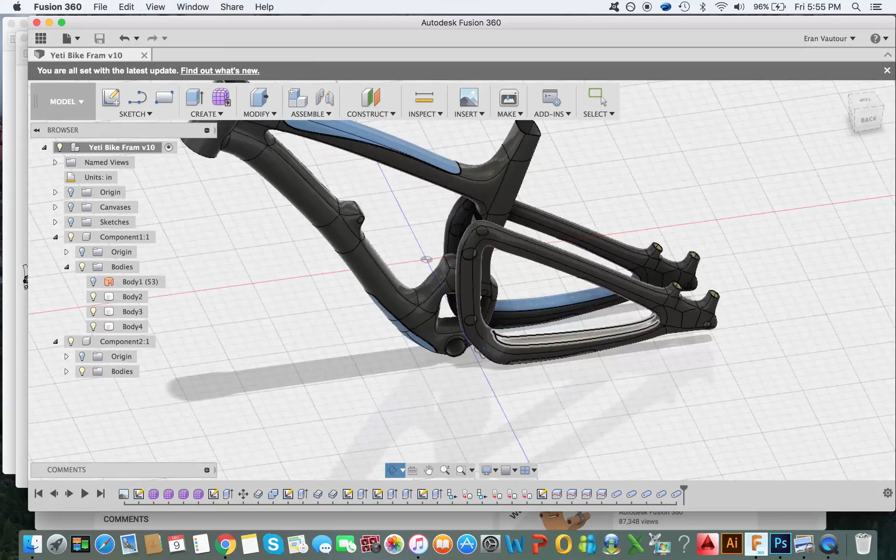Hello, today we'll be modeling the Yeti SB6 mountain bike, just the frame part of it. So we'll hop right into it.

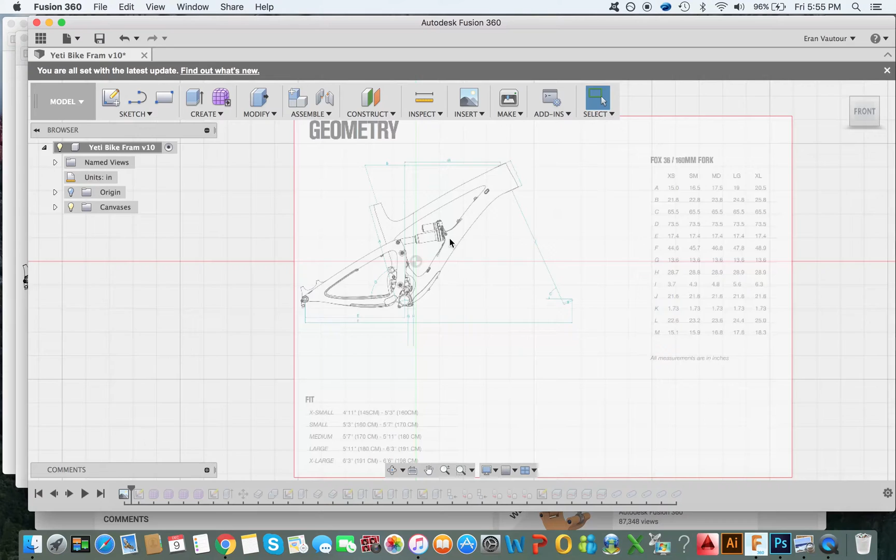Running through the overview of the project, I started by inserting a canvas. I chose one that actually has a lot of the measurements on there. I did a large frame, basically just created a line and then scaled the canvas up to 48 inches.

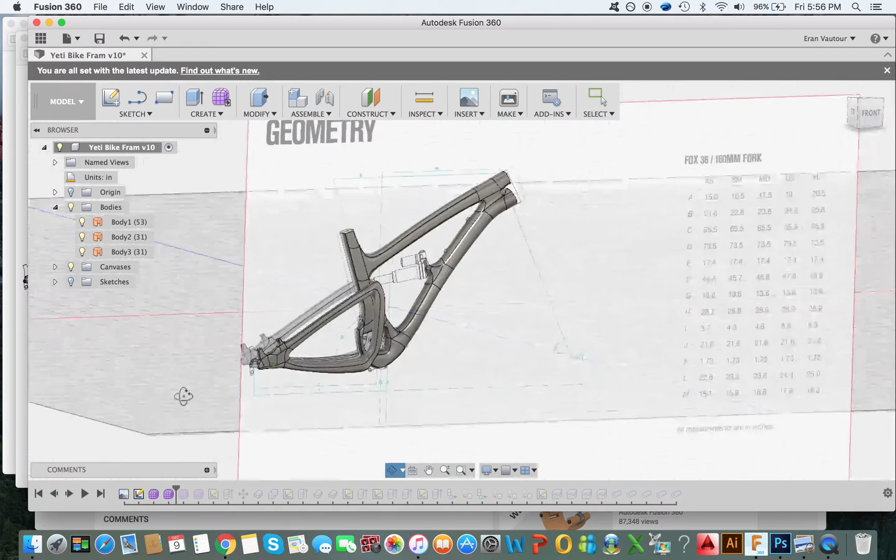Then we sculpted basically the bodies in two parts: the first, the mainframe part, and the back for the rear wheel.

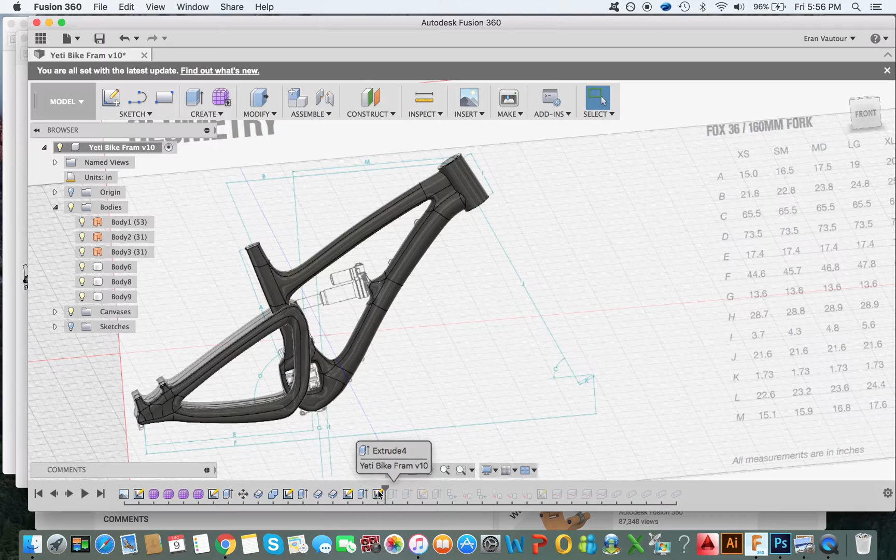Then I basically created a circle and extruded that in order to create the cylinder for the front fork. Rotated, moved that into place, and joined it with the front frame.

Cut out some holes for where the crank would go, as well as the pedals, and then just some of the nuts and bolts that could be added in later if you want to go further.

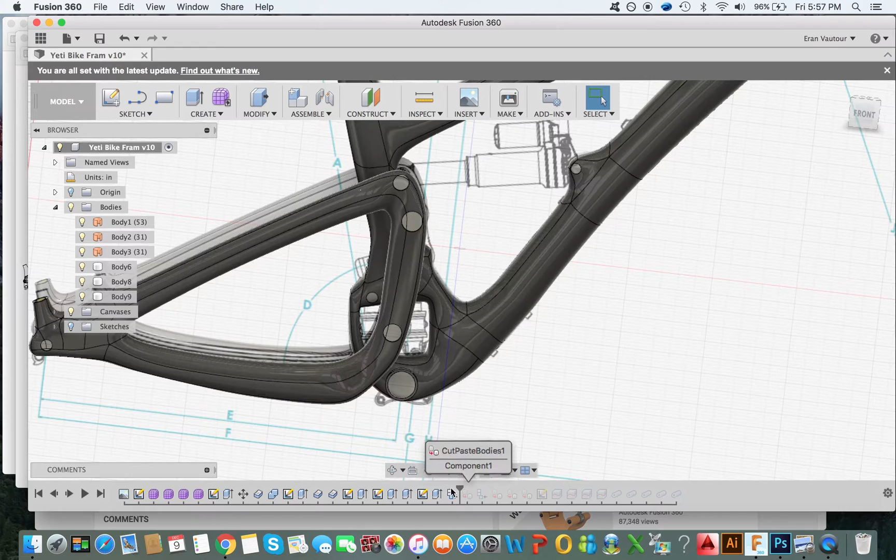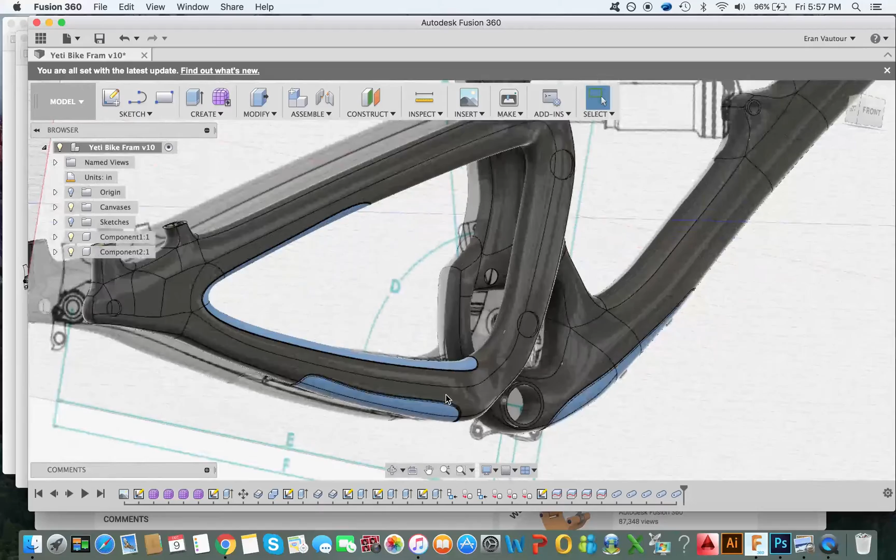As well as extrude some other circles, basically just some brackets in order to fill out the empty cut, and created those, made those into some components, attached some layers, and split the bodies to add some carbon fiber highlights.

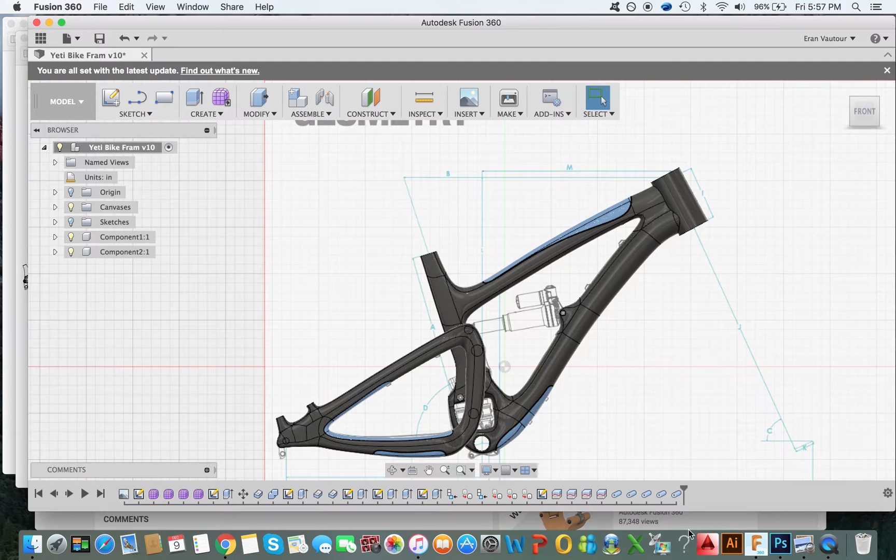Then took the pipe command and ran that around the splits in order to create a nice little parting line. And that is the finished product.

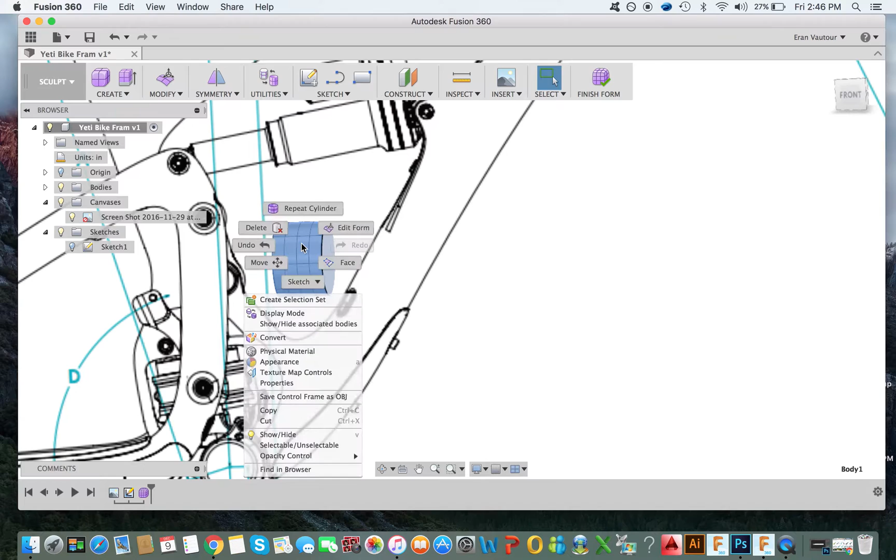So getting started, like I said, I just started by sculpting a body. I started with a cylinder, so I created a circle, I think about 2 inches in diameter.

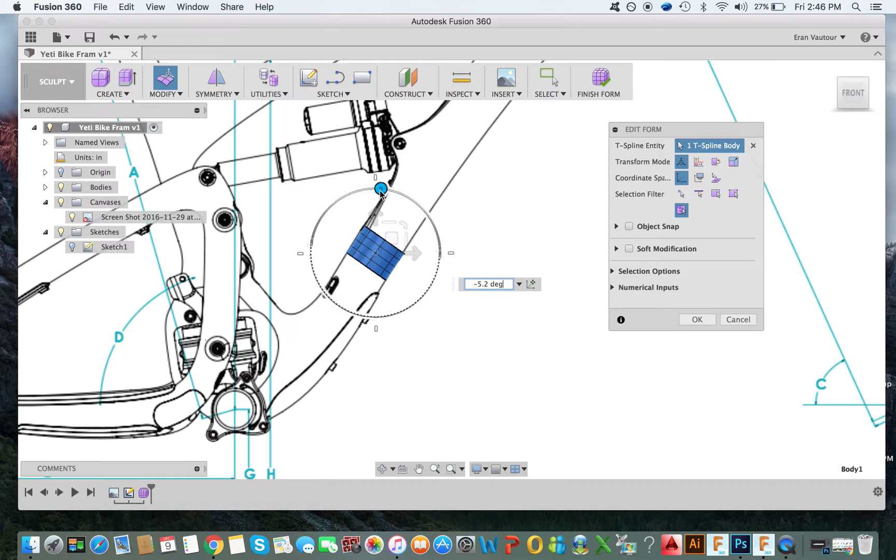Then took that cylinder in the sculpt environment and rotated that into place using an orthographic view. And that was the starting point for the first frame.

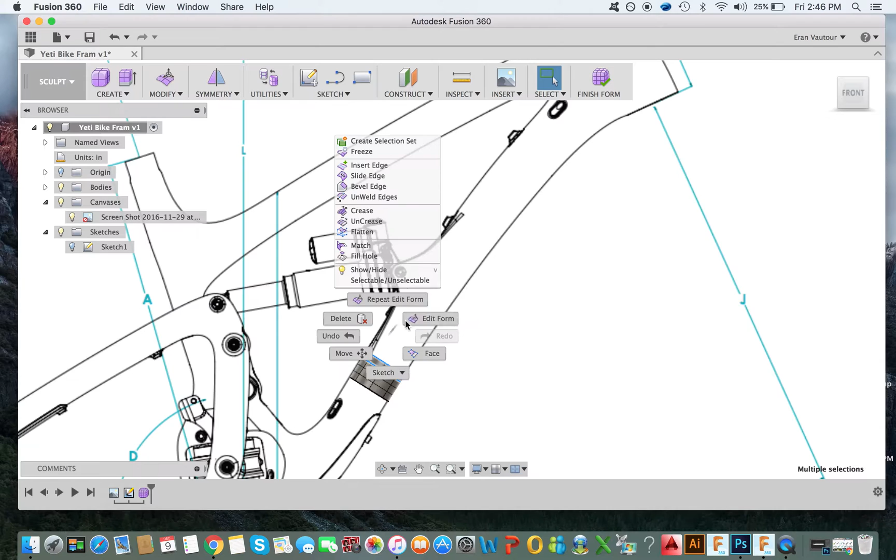Now this process did take a couple of hours, so I sped up the next part of the video to show you some of the tweaks in building the rest of this frame a little faster. It does get a little choppy at some points, I think because the screen recorder maybe didn't record with enough frames per second, as well as just periodical lag while I was using the program. So bear with me on that.

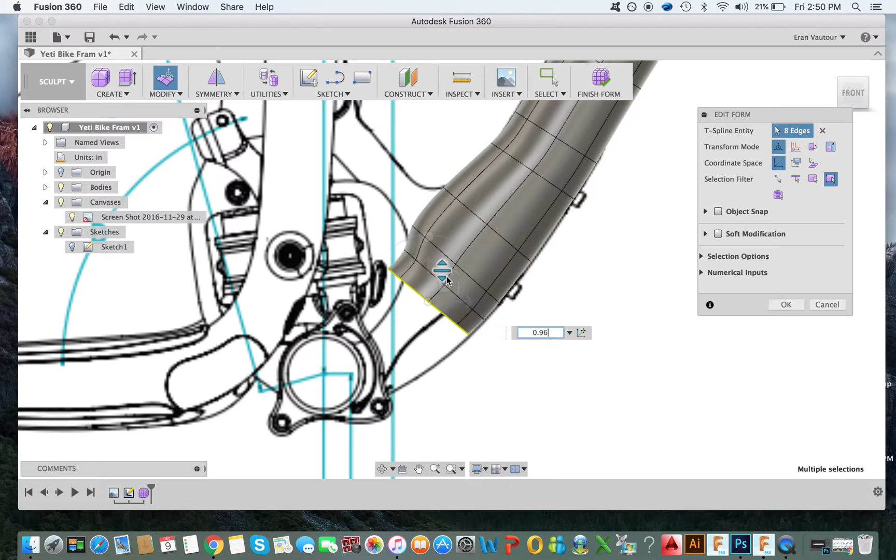Basically, then use that cylinder and drag using the Alt key to add material, so just dragging that and scaling that, matching that canvas.

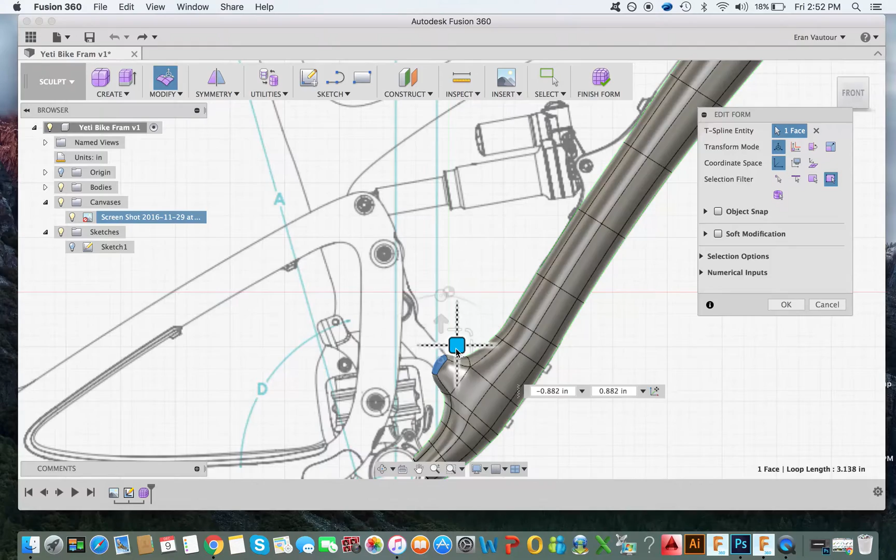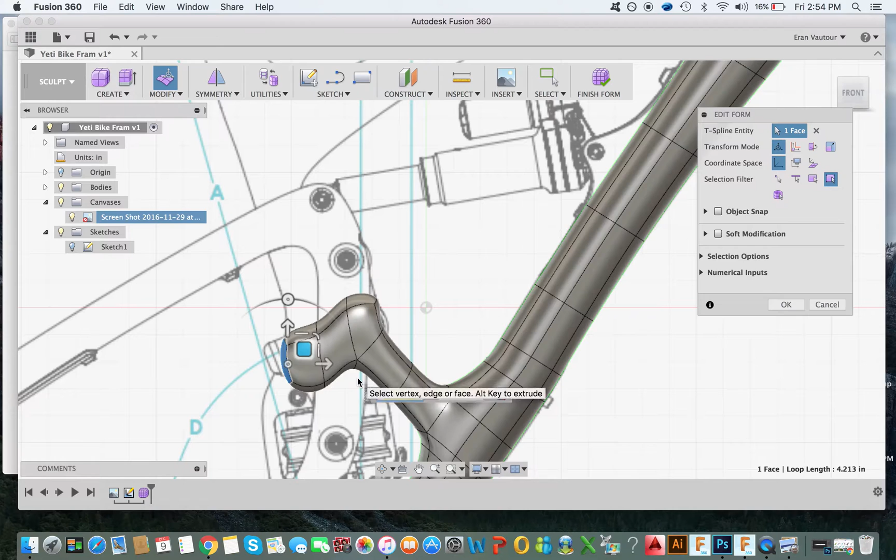Now at first I did think I could use symmetry, however after I built this part of the frame I realized that it was actually extruding two separate parts, as you can see right there when I turn a little bit. So I had to go back and turn that symmetry off and then just make sure I was clicking both sides to grab both faces.

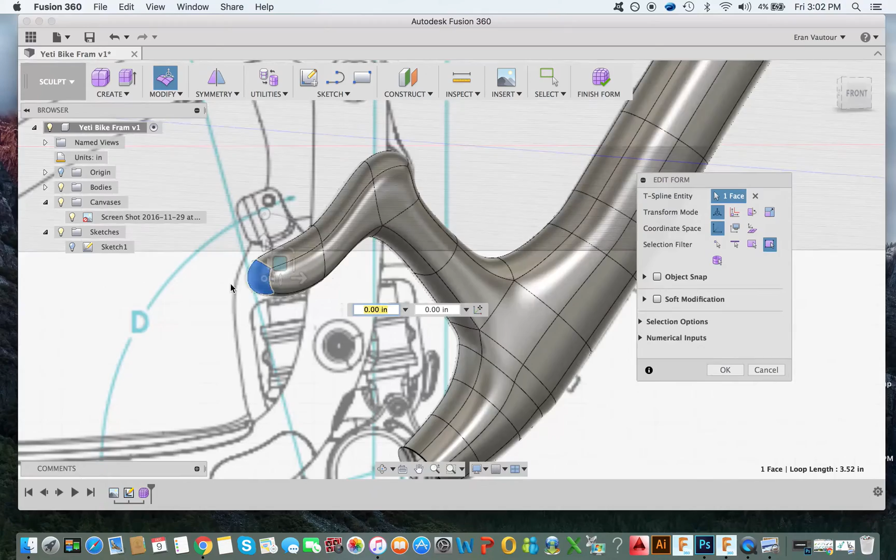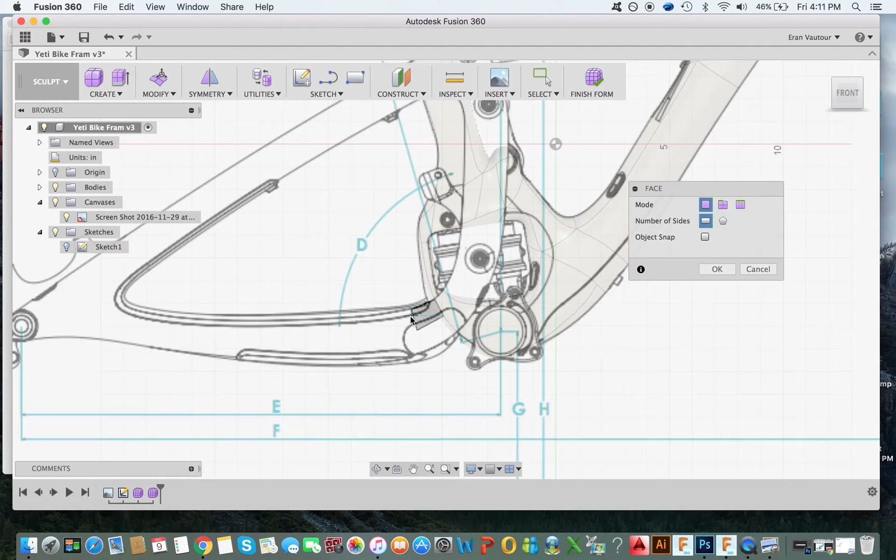So after I went through and created that entire top frame, I then moved on to the second sculpted piece, which was the back of the frame for the rear wheel. I decided to do this one using the create face command.

Basically just traced out some faces along that outline there, making sure to click on 4 points.

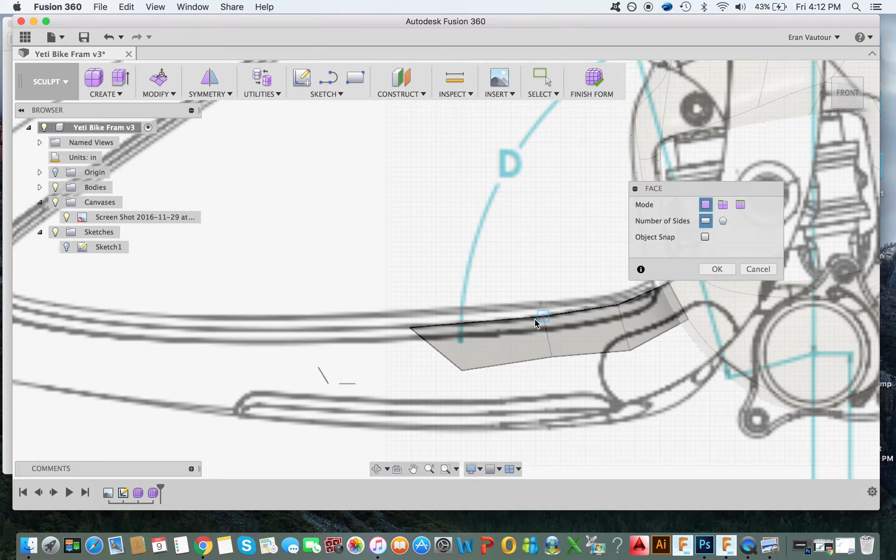I knew that I only wanted it to be about 2 faces wide, so just making the boxes about half of the height, and then always making sure to try to keep the geometry as clean as possible, so not too many slanted corners, although it does get a little wacky in some places.

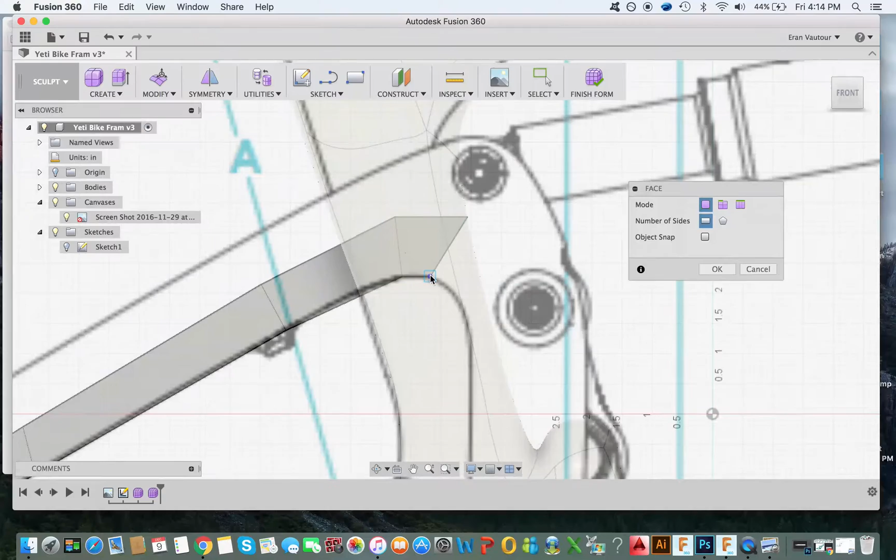And I was occasionally checking out an additional picture, just to give a little more information.

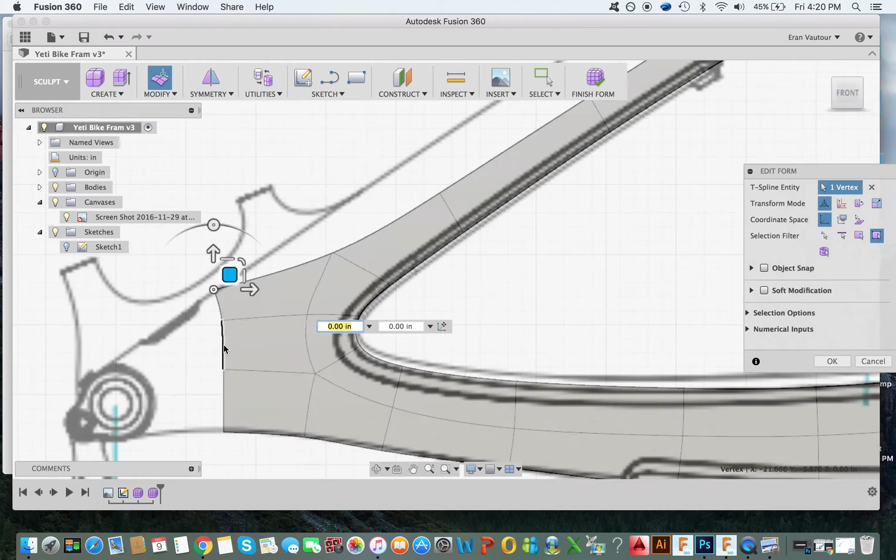So I went ahead and sped this part up as well for you. Again, sorry, a little bit choppy, but basically just creating faces around that image there.

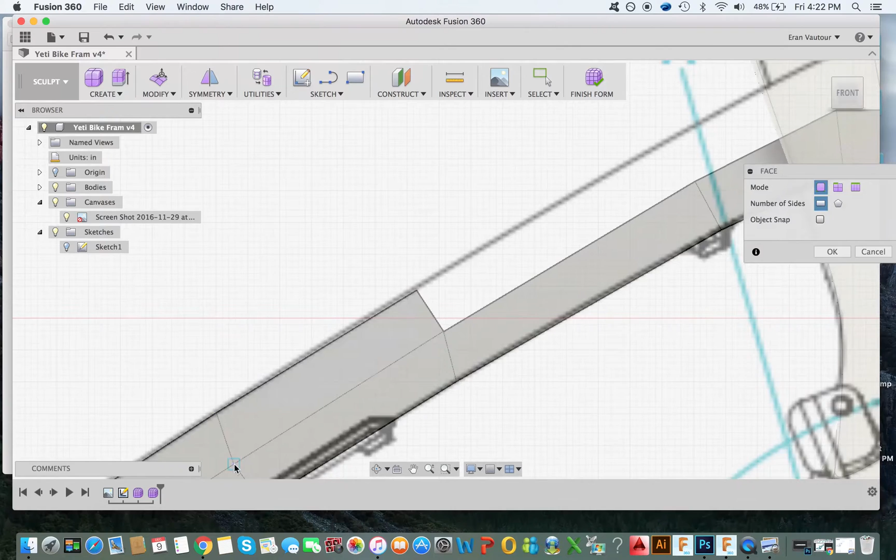One thing to keep in mind: making those smaller faces as you go around the bends so you get a cleaner curve.

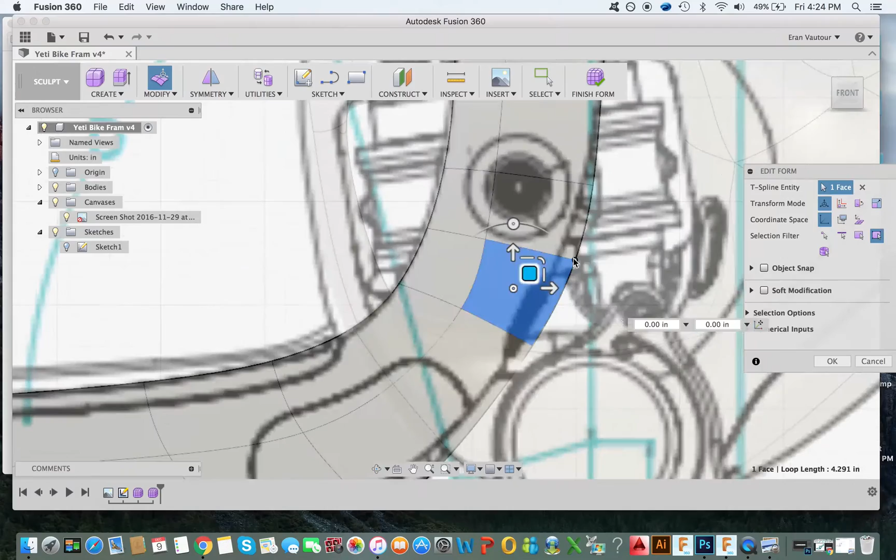Those faces get a little slanted. Didn't cause me any problems, but something to be conscious of.

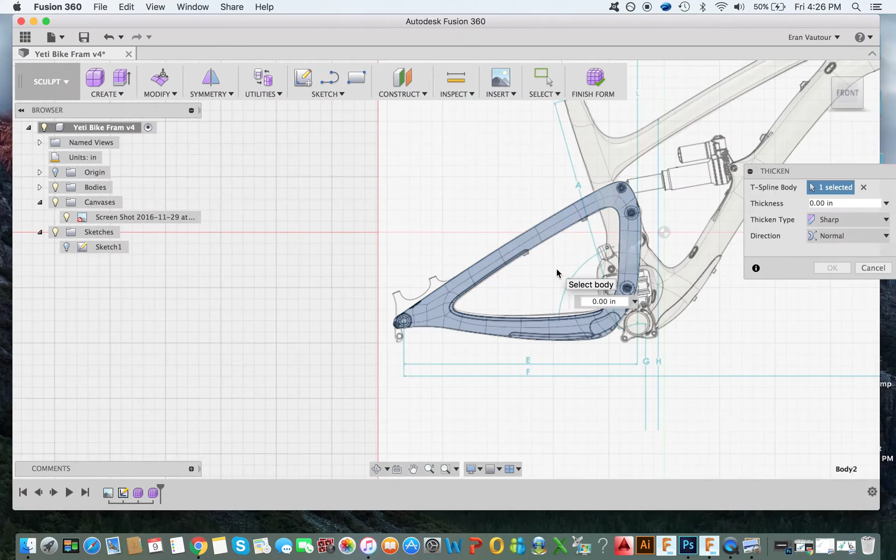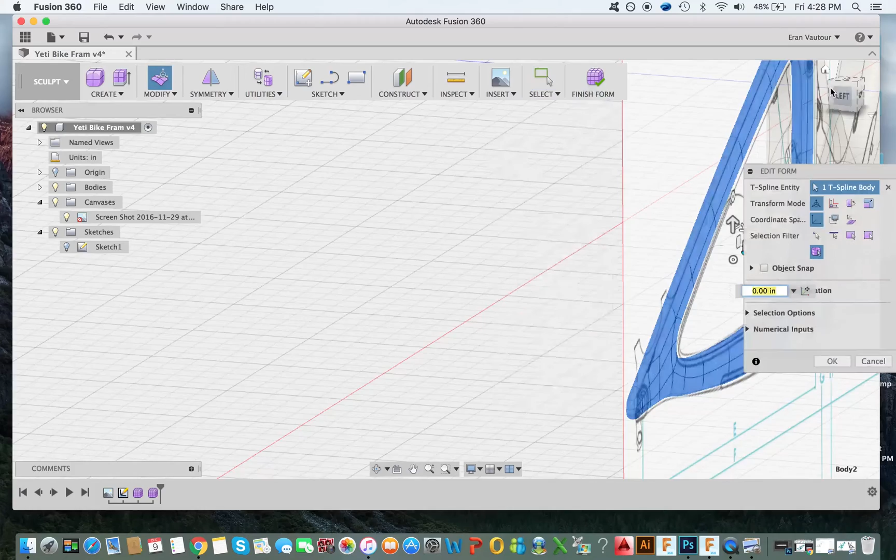And then just tweaked out, made sure everything was lined up correctly. Had to do a little bit of problem solving down here as well, just to create that curve making sure I was using 4 faces.

Always make sure to save as you go. Definitely had this crash on me a few times.

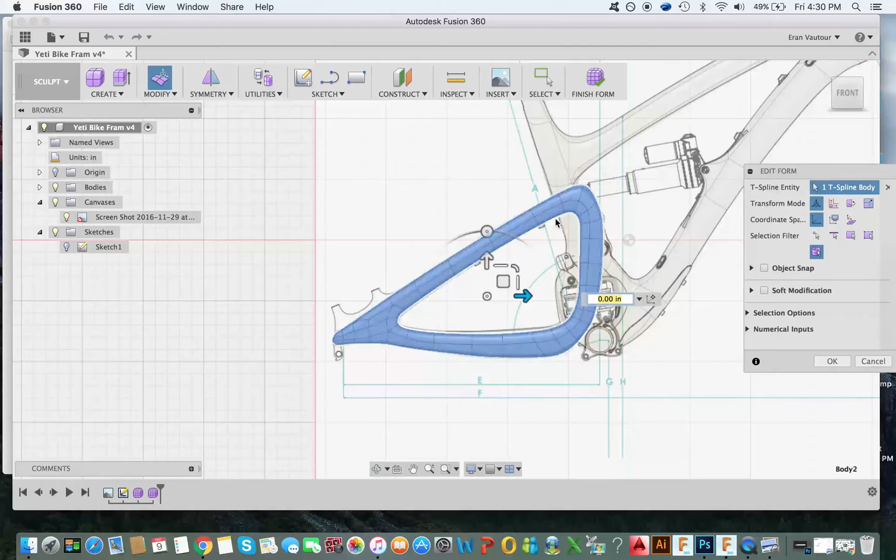So not the cleanest geometry, but it wasn't necessarily going to be the most complicated part. Some of those faces were quite alright, just being a little slanted. A little more tweaking to get everything lined up perfectly.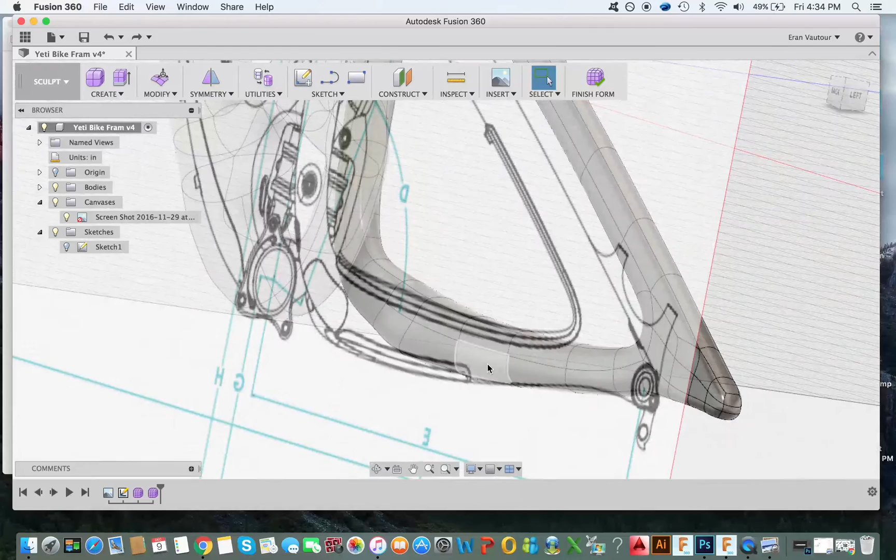And just checking to make sure I was getting everything right by looking at that other picture, a different view.

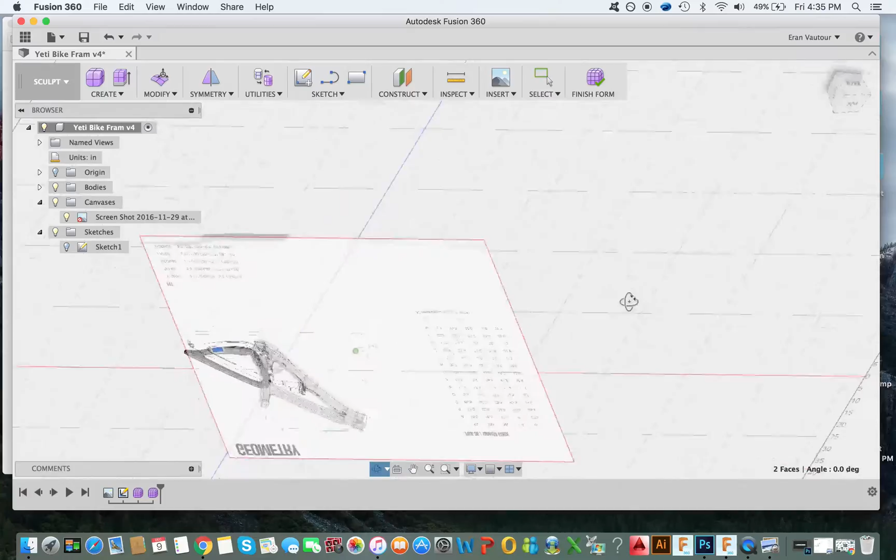I then thickened this so that it was, I think, about a half an inch to make it an actual structure. Made sure to click soften, thicken, so that those were nice rounded edges. Actually, I think I did about 1 inch.

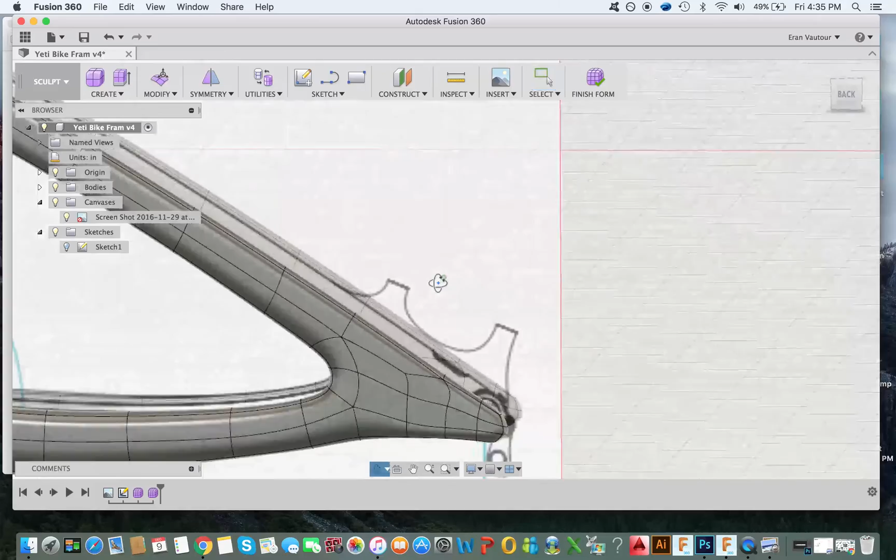Moved it over so that it was on the sides, and expanded the back part of it out so that it had room for that wheel, and then it dips inward to connect to where the frame is. See that in just a minute. There we go.

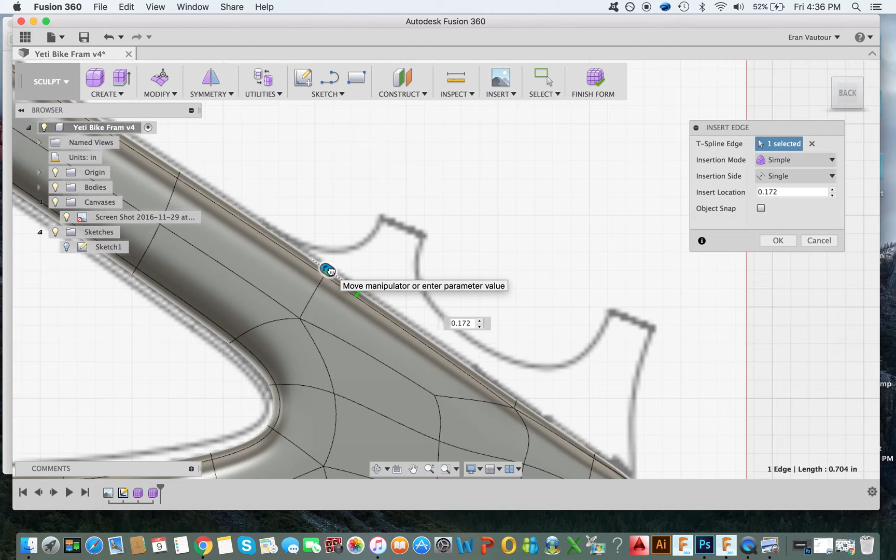Wasn't sure if I wanted to rotate it or not, so I just kept it straight. It's hard to tell from this view, and there weren't a lot of orthographic views offered online.

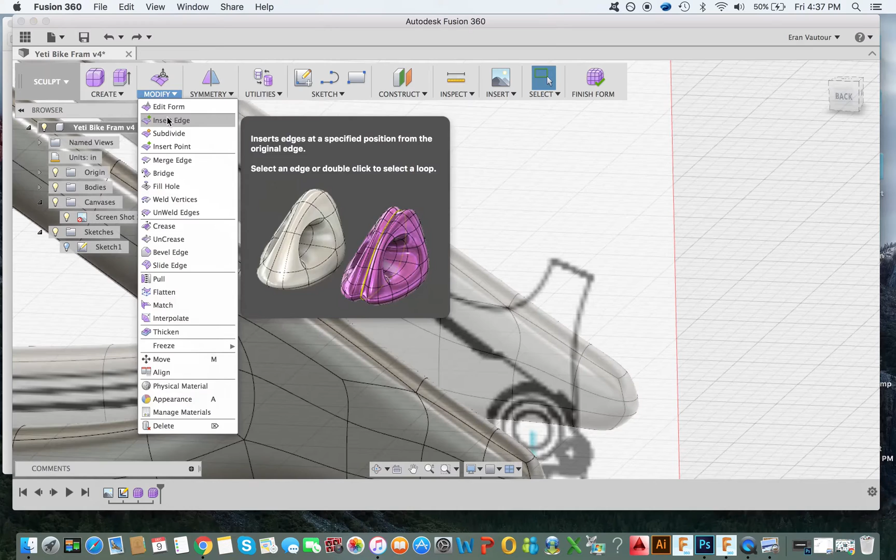Then I basically pulled out the bottom a little bit. It was a little thicker, probably for some structural integrity. Made sure there's a smooth transition between that thicker part and the thinner part. Sorry, it gets a little choppy right here, but basically what I'm doing is thickening out that bottom part of the frame just a little bit.

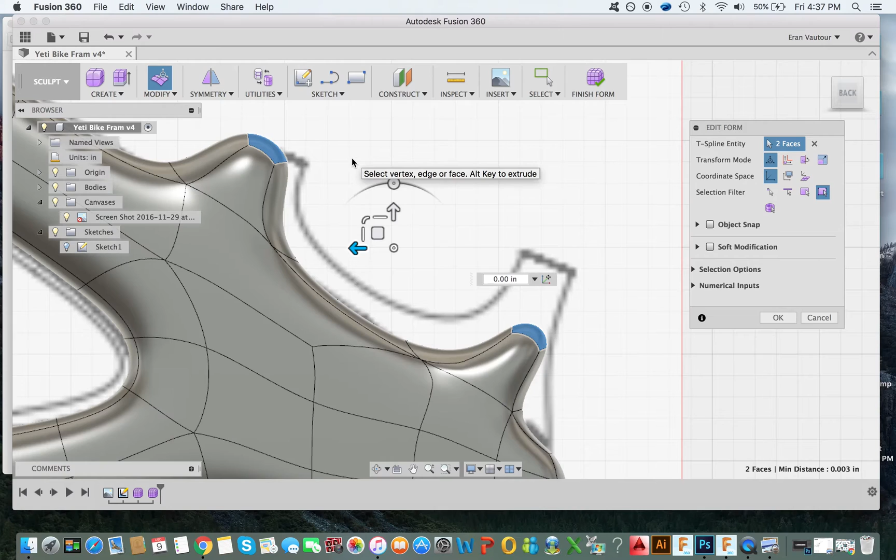After that was good, I proceeded to mirror that feature so that there was one on each side to connect with the bike's back wheel. What's nice about that is everything I did to one mirrors and happens to the other, so that's a really nice feature.

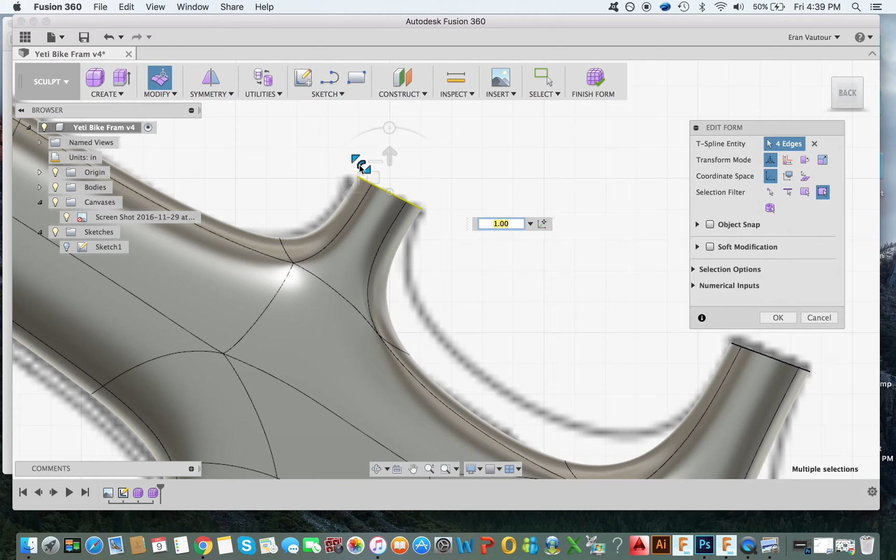And then I had to add in an edge here to get that last little feature on the back of the frame. I'm not actually too sure what that's for, but I wanted to make sure everything was included.

So I added an edge to make a smaller face, and then pulled two of those faces out, again holding Alt command. I think I made the face too big at first, so I had to go back and change that edge.

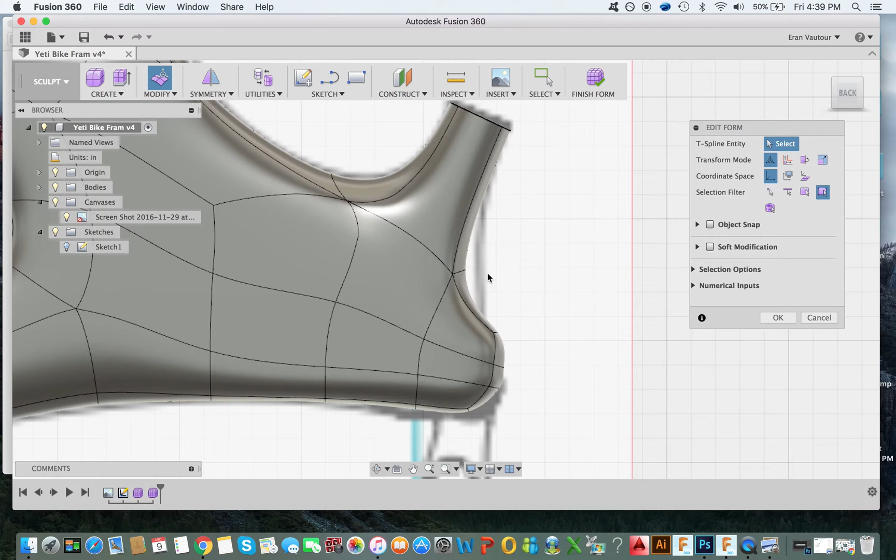Well, the top one's too fat. So I went back, changed that edge, and then pulled those out, again adding material.

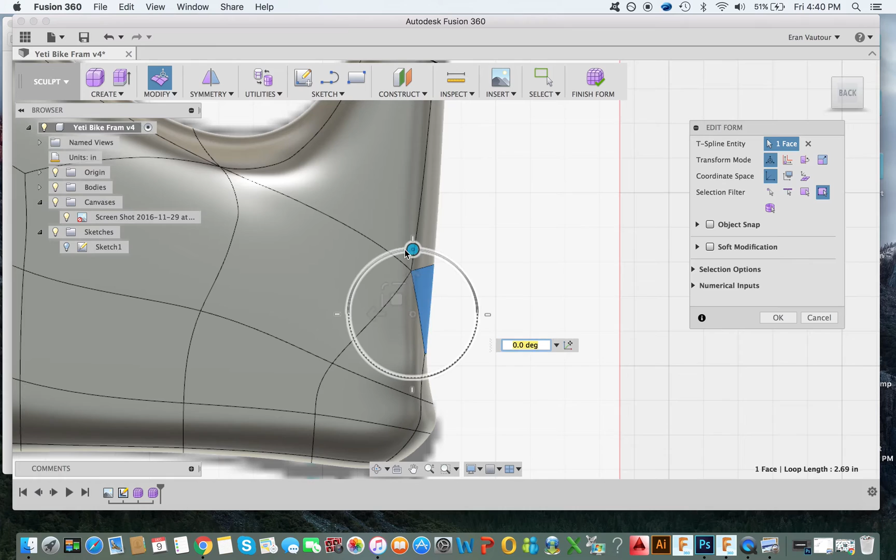I then deleted these top two faces to create that open hole, and then just tweaked these into place to, again, match the sketch.

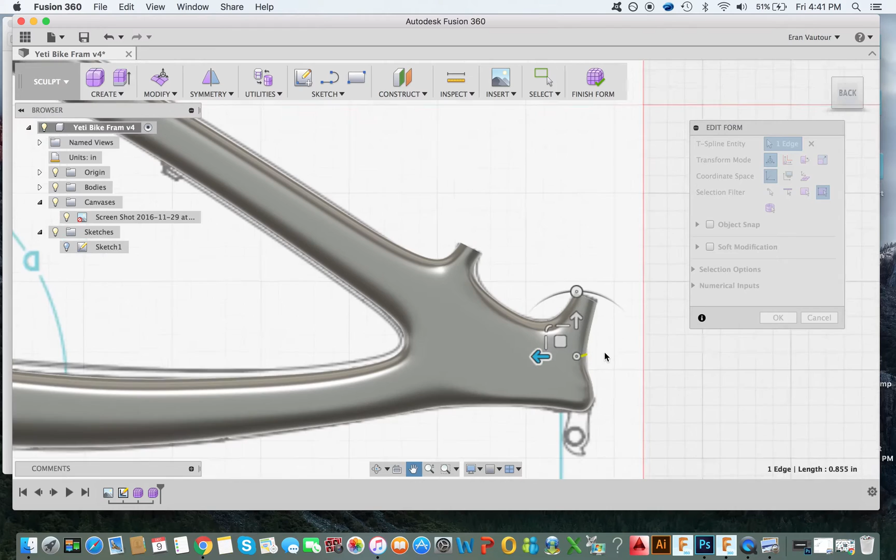Again, the geometry got a little wacky here in the back, but I did my best to clean it up a little bit and straighten out some of those edges.

Finished that form, so we have the main parts of the frame now.

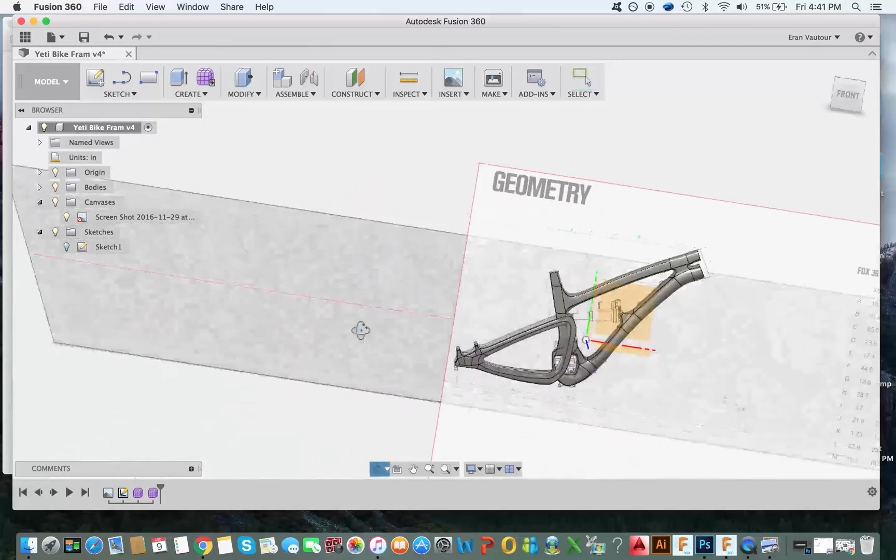Then made a sketch where all the attachment points are for the shocks, and where the crank would attach.

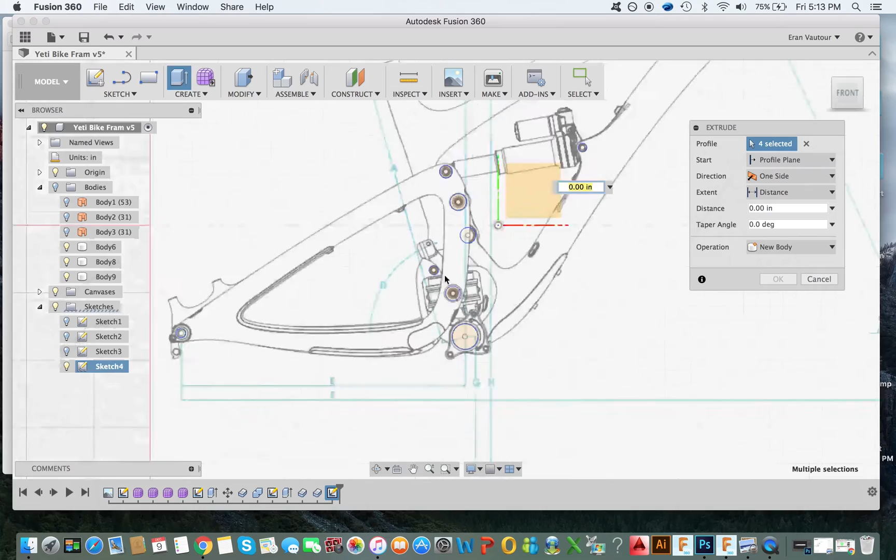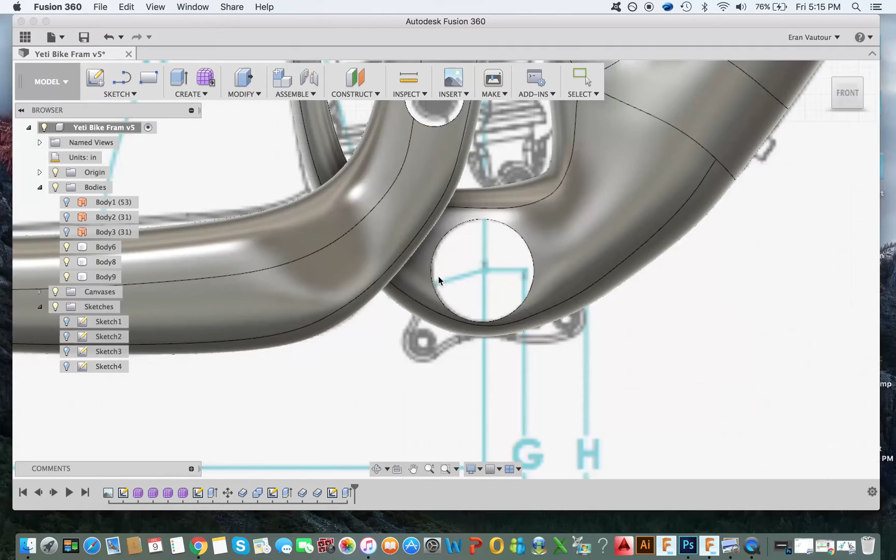And proceeded to press-pull those circles in order to cut through the frame. Then extruded and offset that circle in a little bit so that I had something to extrude, and so that it wasn't just an open hollow structure right there.

Did the same for this whole section.

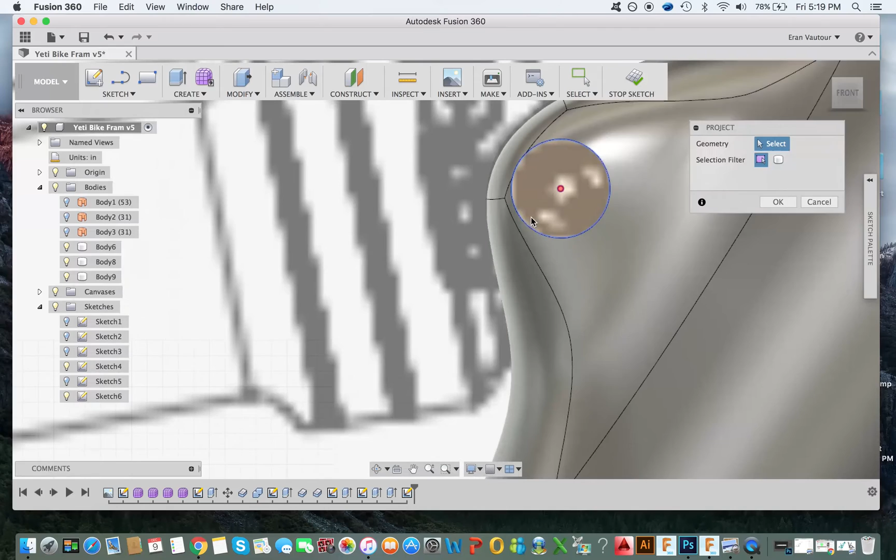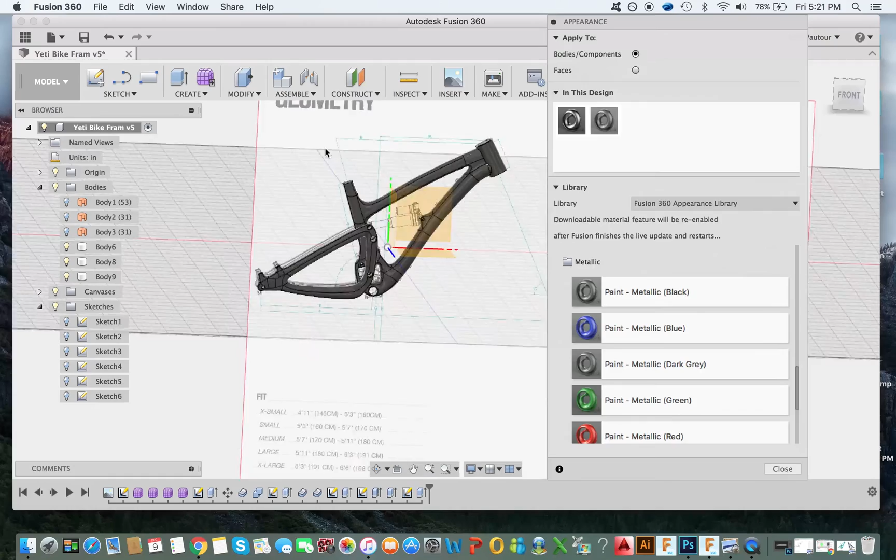Once that was all done, we got to toss on some materials. Chose a nice glossy black. I did realize I wanted to add a couple extra details to it.

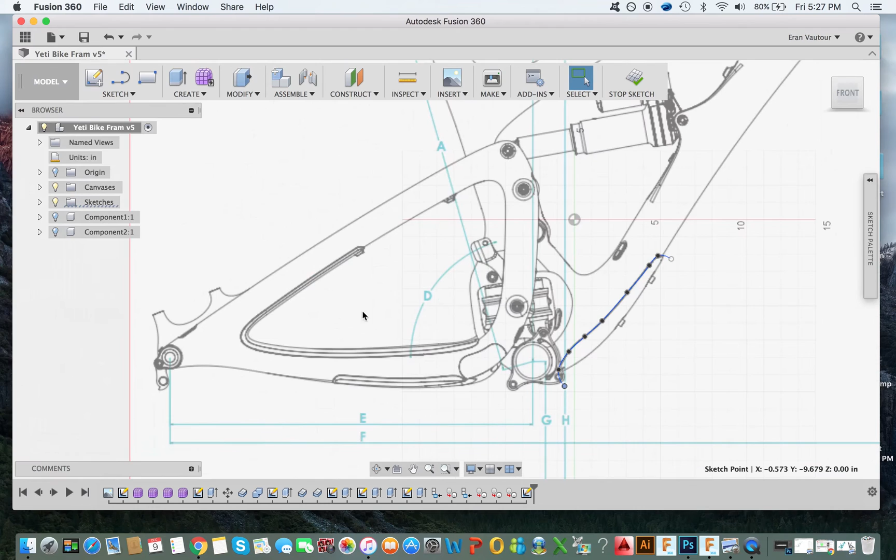So what I did was go in and draw some splines where you saw those extra little highlights on the bike, as well as added some of my own, just to make things a little more interesting for the render.

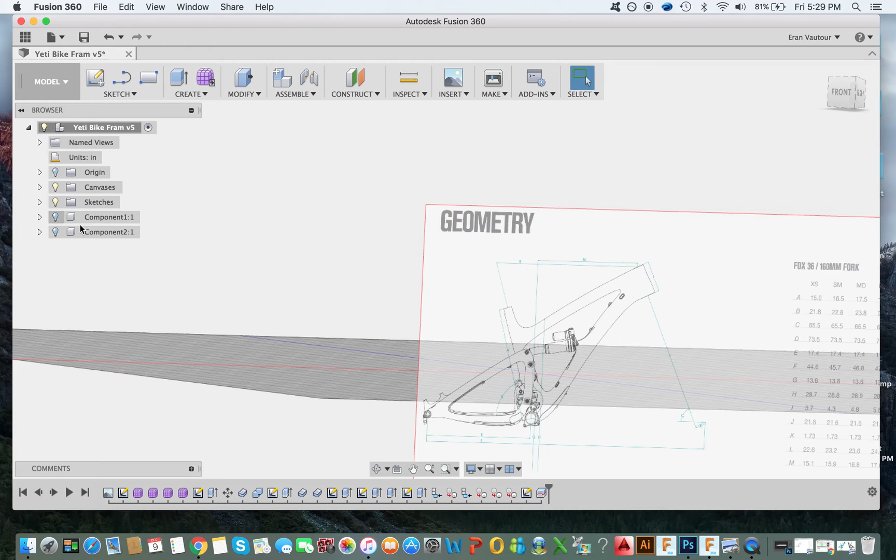I was unable to take those splines directly. At first I was thinking I had to extrude them, but then I remembered you can actually just go to split body, choose your body, and then I turned that body off so I could get to the spline, which is in the middle, and it basically used that feature to split all the bodies.

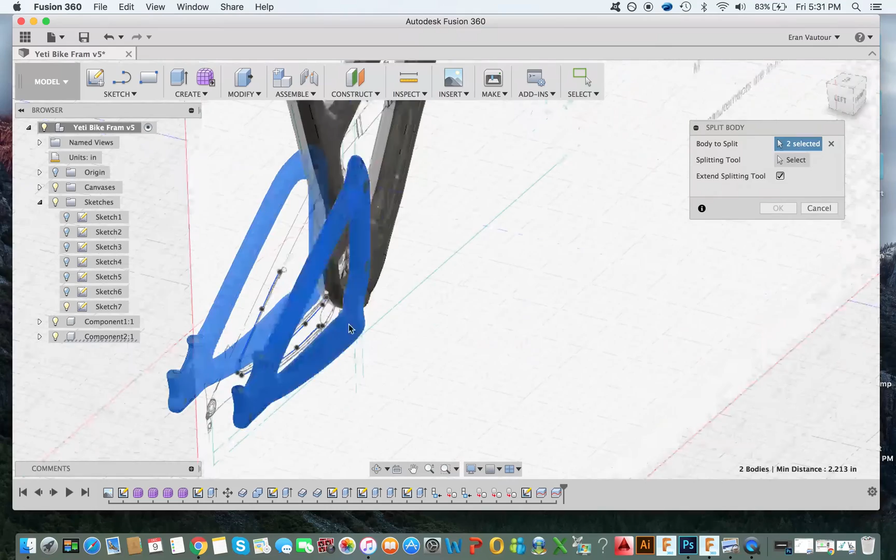After that, I went through and took the pipe command on each of those new faces along that line. If you select the outline of where it was split, it'll run a pipe command and cut to make a nice little parting line.

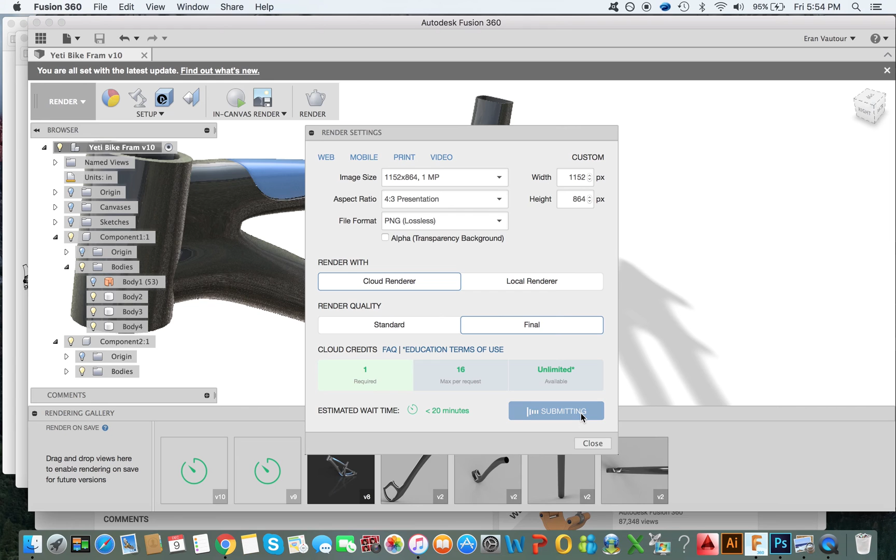Then I finished up by attaching some carbon fiber to those faces, and going into the render environment, playing around with some of the environment settings, I decided to go with a nice little color background, and extended the focal length a little bit to create some more dynamic effects.

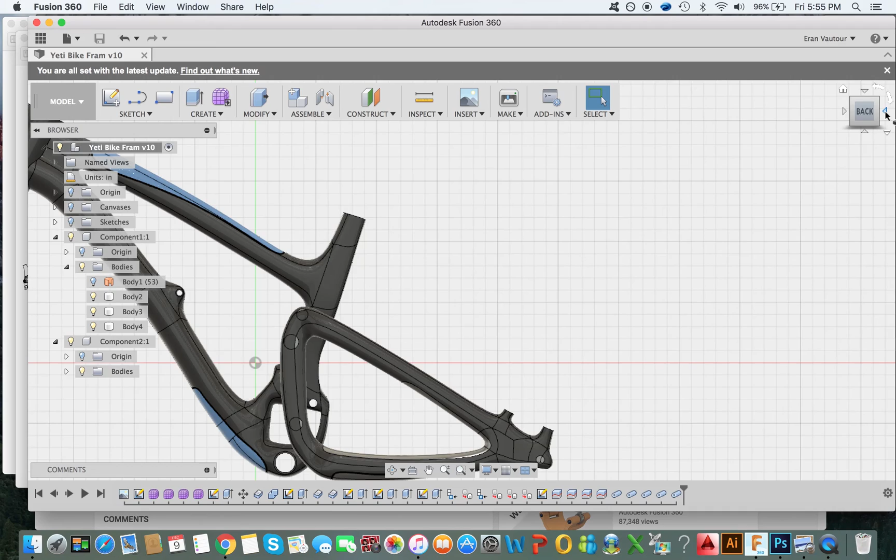It was difficult to find a good angle to create some dynamic renders, but by increasing the focal length and getting up close to the bike, I got some pretty cool effects. So that's my final, and thank you for listening.